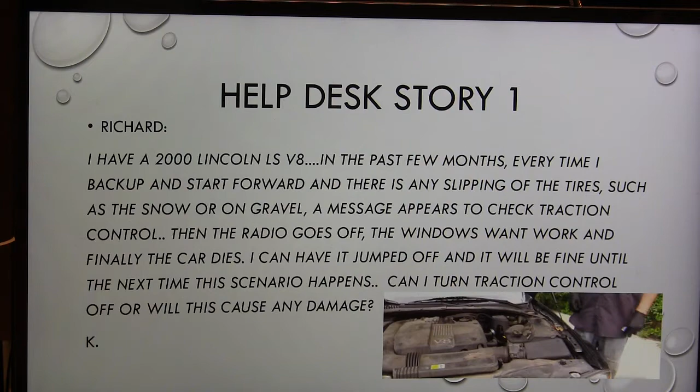It won't work. I can have it jumped off and it'll be fine till the next time the scenario happens. Can I turn the traction control off, or will this cause any damage? Was the traction control what was causing his problem?

Now, I happen to have known of a few of these Lincolns giving screwball problems like this, and if any of you guys have seen this, you're already going to know what I was going to tell the guy. But what I told him was the traction control wasn't causing that. In all likelihood, he had one bad ignition coil. One bad coil can cause all kinds of crazy problems all over the car that come and go, because of RFI, radio frequency interference.

So he followed up and said, you're the best. I've replaced 2 ignition coils. My mechanic told me I need to replace the other one soon. He wasn't able to detect the problem with this one. I can't wait to tell him. I bet this has been the problem all along.

Now, that wasn't really such a terrific follow-up. I never heard from him again, but I felt like that's probably what his trouble was, because those Lincolns were dreadful for that, and some other Ford products will do that too.

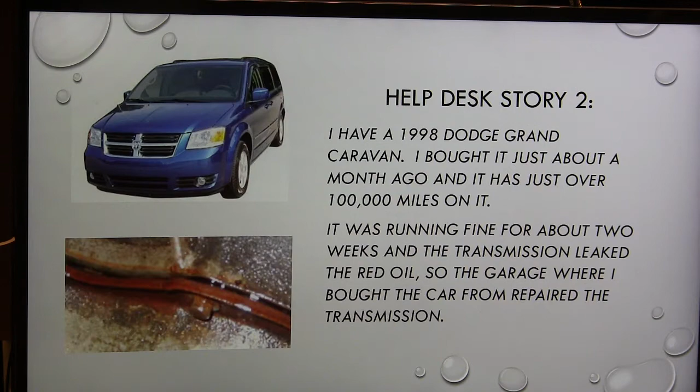All right, help desk story 2. Got a 98 Dodge Grand Caravan, bought it just about a month ago, and it's got over 100,000 miles on it. It was running fine for about 2 weeks. The transmission leaked red oil. So the garage he bought the car from repaired the transmission.

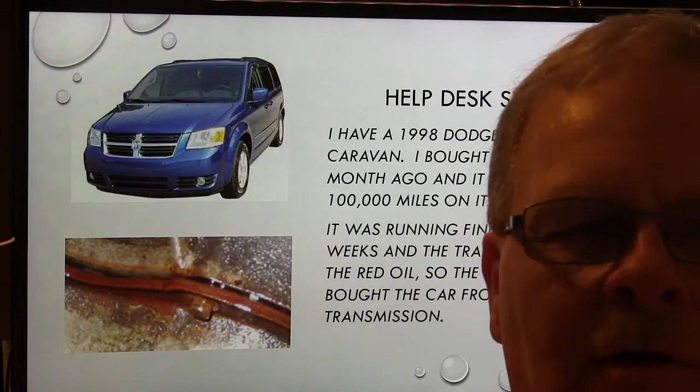So he had to have his transmission worked on because the oil leaked out of it. I guess they were fixing whatever caused the leak. He didn't tell me what the leak was, but for the purposes of making the presentation not quite so dull, I put a leak in a transmission pan here. I don't know what his leak actually was.

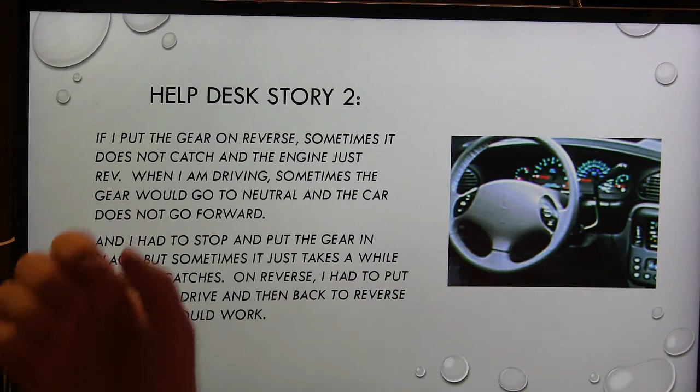All right, so if I put the gear in reverse, sometimes it doesn't catch. This happened not long after he got the car back. And when he was driving, sometimes the gear would go to neutral and the car wouldn't go forward. I had to stop and put the gear in place. I don't know what that means exactly, but sometimes it just takes a while before it catches. So on reverse, he had to put the car in drive and then back to reverse before it would work.

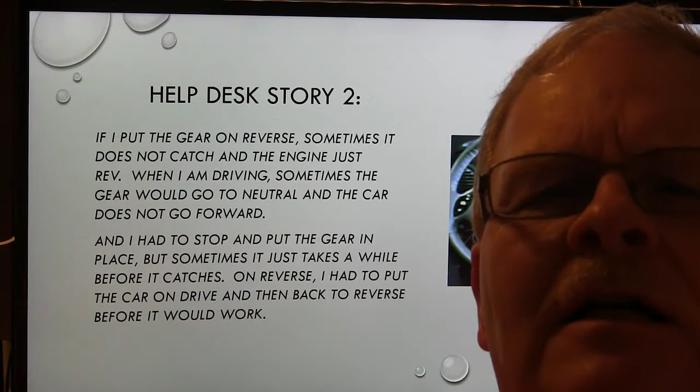He's wanting to know, so what comes to mind? What do you think this is? Anybody that does any transmission work has probably run into something like this at some point, and some of you probably already know what's going on.

He said, I'll take my car back to the garage. I hope you don't mind explaining to me what the possible problems are, so on and so forth. I said, that sounds like the transmission's low on fluid.

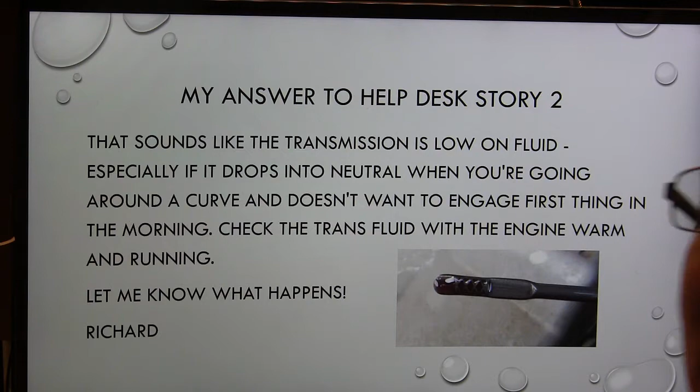Whenever you're driving a car and you go around a curve and the transmission drops into neutral, chances are the transmission fluid's splashing. And you'd be surprised how many cars there are driving out there with dipsticks that are the wrong length in the transmission or even in the engine oil. I'm not exactly sure how that happens, unless somebody lost the dipstick, forgot to put it back when they were filling one up with fluid one time, and then they put another dipstick back in there they thought was right, and sometimes you run into issues like that.

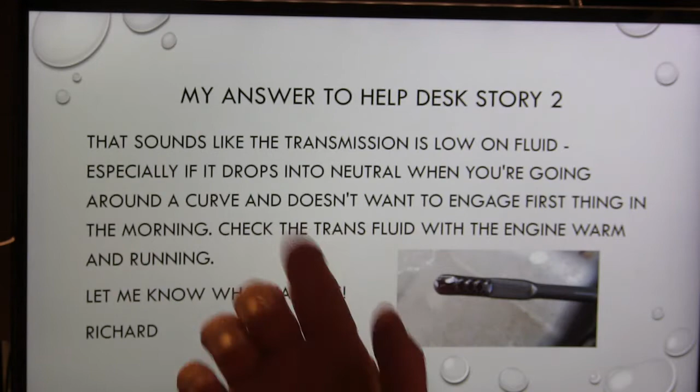But I said, let me know what happens. Have somebody check the transmission fluid, make sure it's full of fluid before you do anything else. My idea is always to do what's cheap and easy first. I preach that a lot on here.

Okay, so he said, I took the car back to the garage and they kept it half a day and told me it would cost over $500 to fix the problem. That's an interesting development, isn't it? Told them I'll think about it, took the car to another place, told them to check the transmission fluid. They said it's low, filled it up, and I haven't had the problem anymore. Well, that's kind of interesting, isn't it?

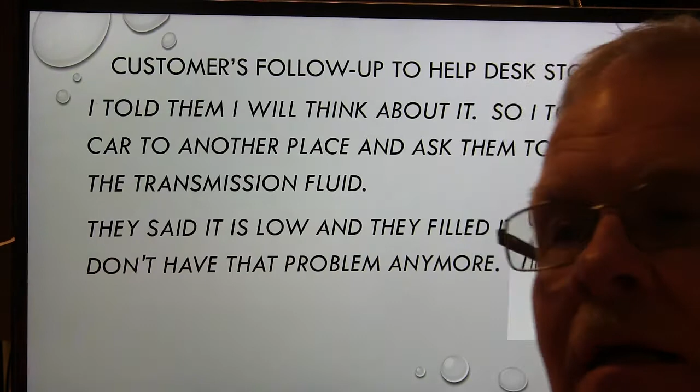The first shop didn't check the transmission fluid. I don't know exactly what was going on there. I don't know where this shop was. I don't know who the mechanic was that worked on it. So I don't really have an axe to grind against anybody. These come from all over the country.

Alright, says the guys at the garage were talking about taking the whole transmission down, but you pinpointed the problem, you're a lifesaver. Alright, help desk story 3.

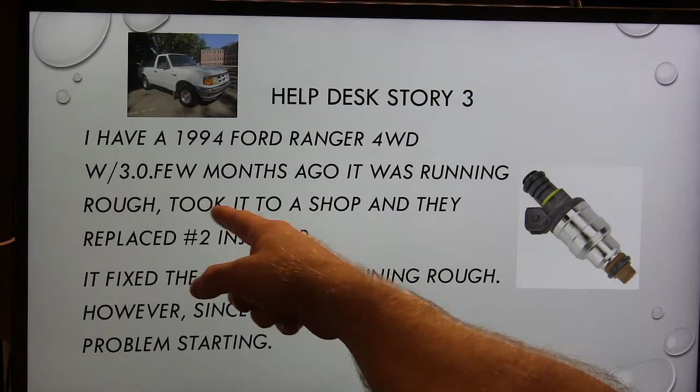I've got a 94 Ford Ranger, and it's got a 3-liter, FE whatever that means. A while ago it was running rough and took it to a shop and they replaced the number 2 injector. It fixed the problem of running rough, however since then it has had a problem starting.

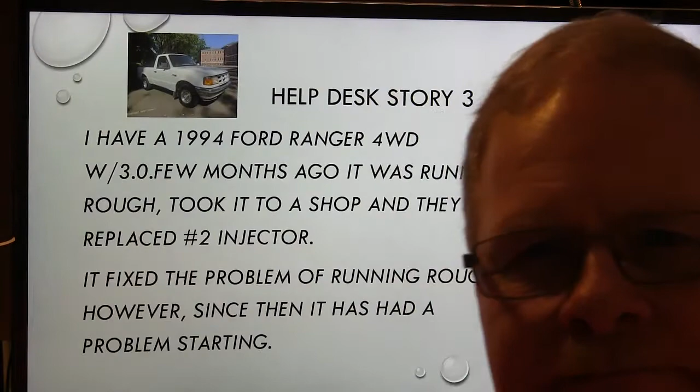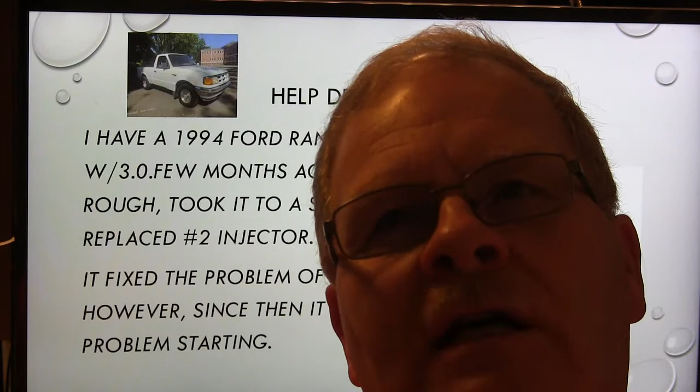Now that's kind of interesting, isn't it? If it wasn't doing this before. Now sometimes, even though it wasn't doing it before, it doesn't mean that what you did caused it, although sometimes it does, you know what I mean? And in that case, you just typically like to give the customer the benefit of the doubt.

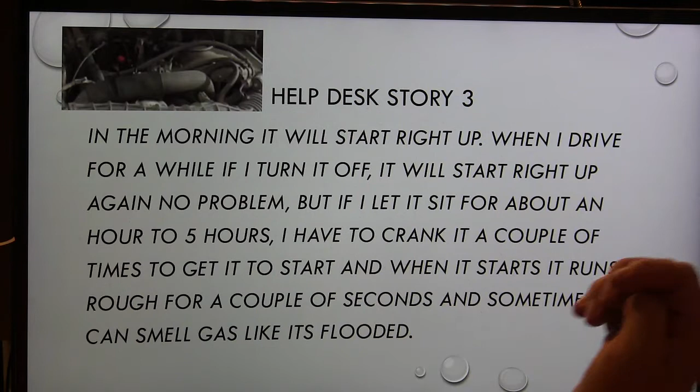In the morning, it'll start right up. When I drive for a while, if I turn it off, it'll start right up again, no problem. But if I let it sit for about an hour to 5 hours, I have to crank it a couple of times to get it to start. When it starts, it runs rough for a couple of seconds, and sometimes you can smell gas like it's flooded. That's an interesting piece of information.

Now, I will tell you this, fixing stuff long distance or over the phone is a drag. It's difficult to do sometimes, and you really want to go help somebody. I got a call one time from Africa when I was working at the Ford dealer. Then we also had Jeep and stuff. These Italian mechanics had run out of ideas on this Jeep Cherokee, and I managed to talk them to a solution on that vehicle to get it started, and that just blew me away. I mean, it was a scratchy phone call, sounded like it was coming from the other side of the planet. And how they knew to call me at the Ford dealer in Alabama, I don't know.

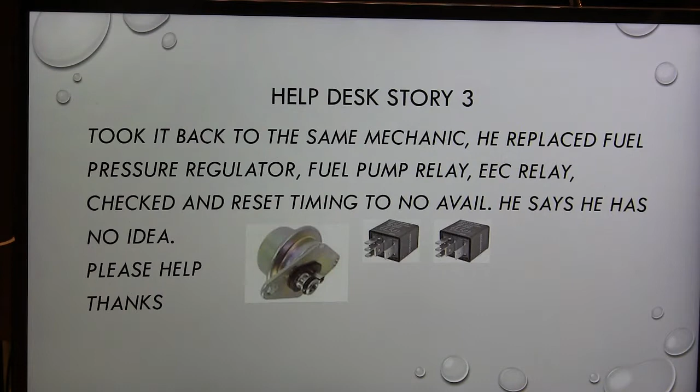But anyway, so he said, took it back to the same mechanic. He replaced the fuel pressure regulator, the fuel pump relay, the EEC relay, checked and reset timing to no avail. He says he has no idea.

Now that's pretty scary when you're taking it to somebody who's supposed to be working on your car and they keep working on it and they say, I don't have any idea what's wrong. That's spooky, isn't it? Can you put yourself in the customer's place, right?

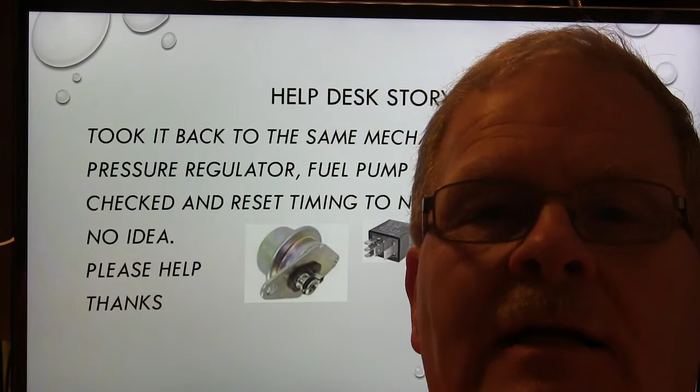Okay, so I says, get it to the point of where it'll exhibit the symptom. Whenever I've done anything like this, what I would do is I would start it up, and while it was still running crappy right after it started, I'd switch it off. Don't let it smooth out. Switch it off, pull all the plugs out. You're going to find one that's soaking wet with fuel.

This is not when it's running normal after it finally clears up. Find one that's soaking wet with fuel or sooty. That particular injector is going to be the one that's dripping. Now the other end of that is one dripping injector, when the engine is hot, can fill the entire manifold up with enough steam that can condense and wet all the plugs briefly when you're first trying to start it. And one dripping injector can cause a hard start.

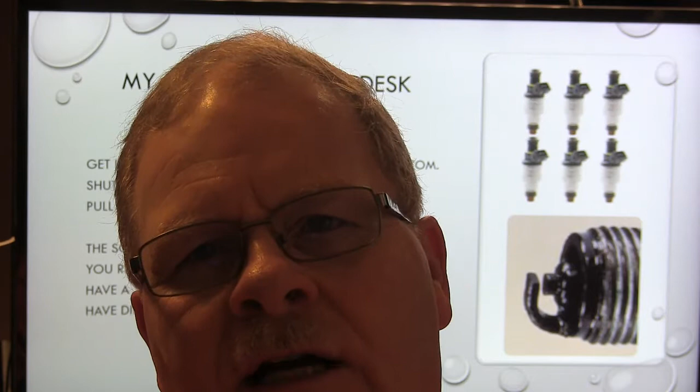First time I ever saw that was on a Thunderbird that had 3 dripping injectors, and it'd spin about 45 seconds before it would fire up. And usually, breathe on one of them, they fire right up.

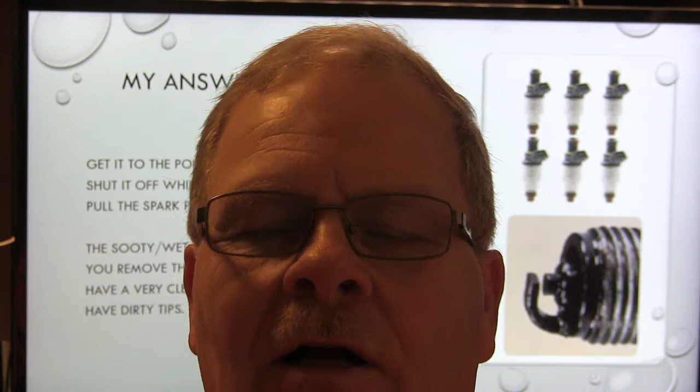Anyway, I says, when you pull the injectors out after you find a sooty spark plug, one of the injectors is going to be clean on the tip. If the injector is not leaking, it's going to have carbon and black crud on the tip. But if it's clean as a whistle, it's leaking, and that gas is keeping that carbon dissolved off there. So that particular injector will be your leaker. If you replace that one injector, then you'll have it done.

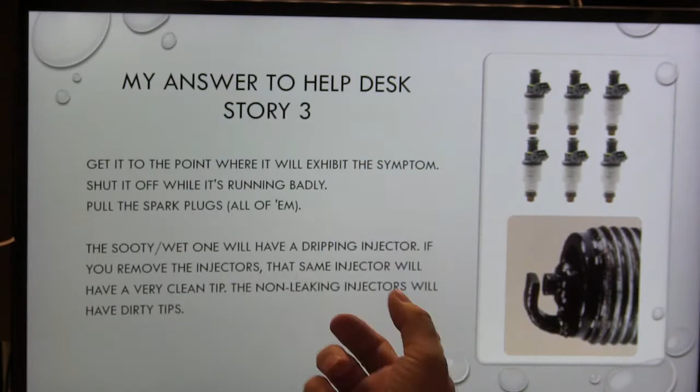I've fixed all kinds, Fords and Jeeps and other vehicles, the same way. So I said the non-leaking injector will have dirty tips.

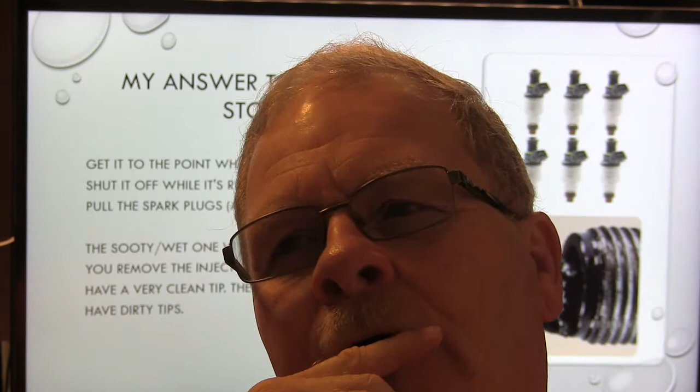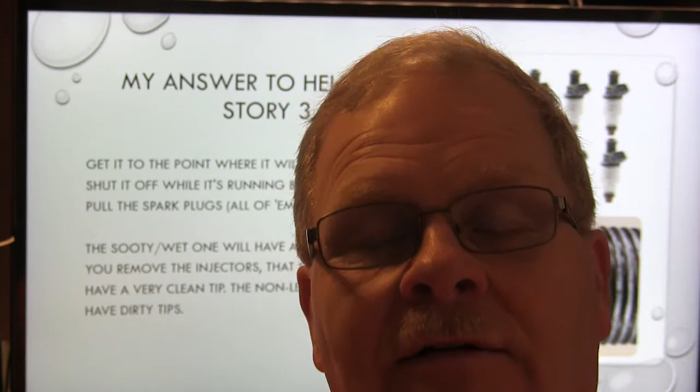Another thing you can do, if it's not a fuel injector and it's not a hard start, but it skips when you first start it until it smooths out, particularly if you're losing a little bit of coolant - if you do that and switch it off while it's still skipping, and you pull the plugs out and you see steam rolling off one of the plugs, you've got water, or coolant, making its way into that cylinder. That's another technique I've used.

All right, here's a follow-up: thanks, works great now, Tom. That's not really any information. I guess he felt like he needed to tell me that everything was okay, but I don't know what happened. He didn't give me any data here.

In this consumer-driven world, folks tend to take their business elsewhere if they don't like the merchandise or the service. That's just the way it is. Most people don't mind paying the bill if the vehicle is fixed when they drive away. But if they pay a big bill and drive away and they still got the same problem, they tend to get pretty hot about that.

Rather than giving the first shop a chance to straighten things out, they try another shop, and I'm always saying, why did you go to a different shop? Because when you go to a different shop, it turns into a he said, she said, and we didn't do that, and nobody winds up responsible, and the customer's holding the bag.

Some of them tell me they've gone back to the first shop, been told more money needs to be spent, and that kind of thing's frustrating. Who wouldn't lose confidence in a shop like that? But from a shop owner or technician's perspective, sometimes it seems like the deck is stacked against us.

One time I was working on a vehicle that was the dealer transfer vehicle. It was a '92 Ford Taurus that had 325,000 miles on it. Still ran like a sewing machine, but other parts of the car tended to wear out. This old guy who drove that vehicle for the dealer transfers actually brought the car in for some wiper blades. I went out there, got the wiper blades from the parts room, went there and popped them on.

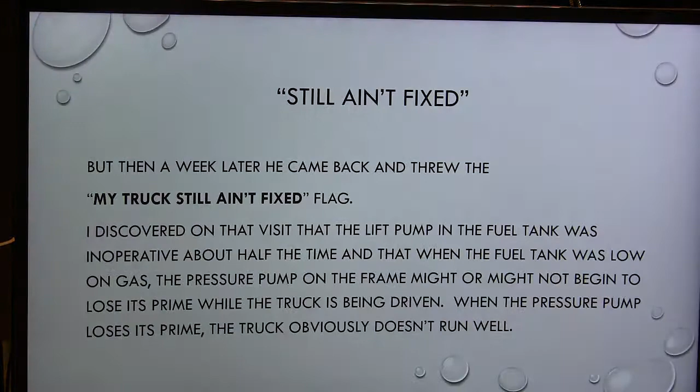When I did some checking, what I found out was the lift pump in the gas tank - back before 1990, Ford had a lift pump in the tank and a pump on the frame. If that lift pump wasn't consistently feeding the pump on the frame, you'd have all kinds of issues, sometimes no-starts and other things. Ford was doing that back in the 80s - they'd put a little lift pump in the tank, kind of like a windshield washer pump, that just moved the fuel to the big pump on the frame. They finally got smart and did away with that in 1990.

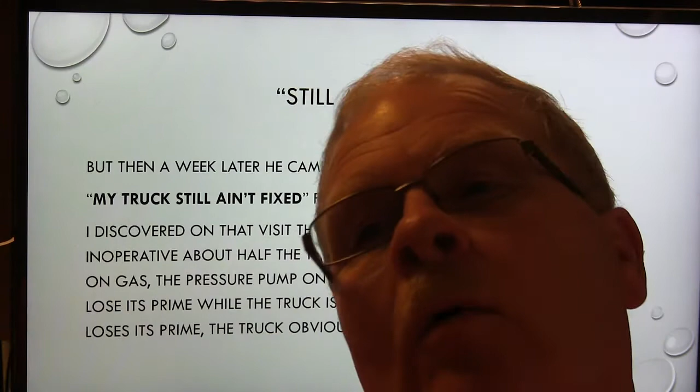The point is, when I put my ear - sometimes I'd just put my ear against it, or use the stethoscope - I could tell the pump in the tank was coming and going. When the pump in the tank was not pumping, it would cause bubbles and stuff, and the pump on the frame would lose its prime and cause it to run bad. I told him, I'd already done all this - I didn't sell him anything he didn't need, right?

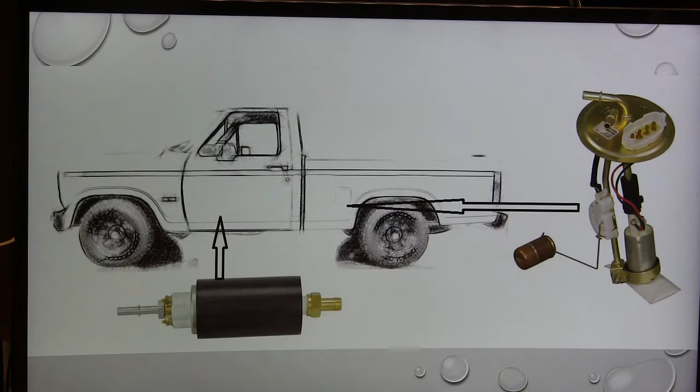So the pump in the tank feeds the pump on the frame on these older model trucks - that's just the way that thing's set up. That would throw a lot of people because they didn't know there was two pumps.

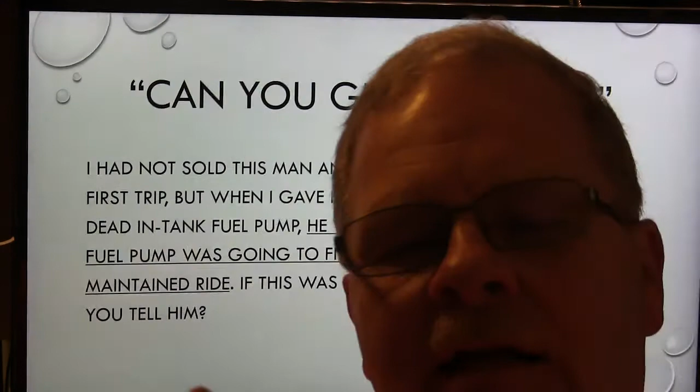But anyway, I hadn't sold him nothing he didn't need. He had another problem - he'd already paid us a bunch of money and had the idea it was our fault because we didn't catch everything. But if you've got a pump in the tank that's coming and going, you're not going to catch it. If you fixed everything else and it runs good, and you didn't drive it 50 miles, you may not catch the pump in the tank not working right.

So he says, if you put this pump in this tank, is this going to fix my truck? Well, it's a junky truck with lots of miles on it - he didn't maintain it worth a flip. I said, you won't have any more trouble with your truck, you won't even ever need another oil change, it'll never need to be back in the shop for anything else, it'll be fixed forever. Really? This guy's whining about this.

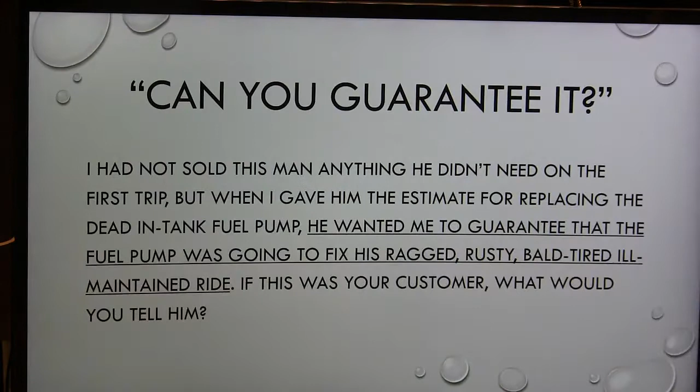So anyway, I sent him back to talk to the service writer. I don't remember if he let us fix that truck or not, but some people you can't satisfy.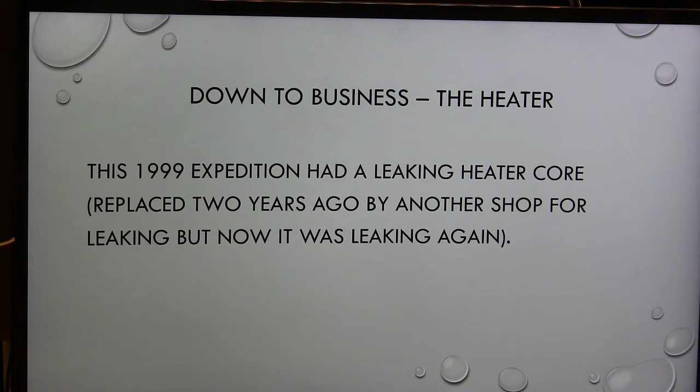All right, so we had to pull all this junk off to get to it, and that's what it looked like right there. This was at the college. The first thing the guy noticed when he pulled the panel and accessed the blend door and the heater core was that the blend door was installed upside down. He had done these before, and he was sharp enough to catch that.

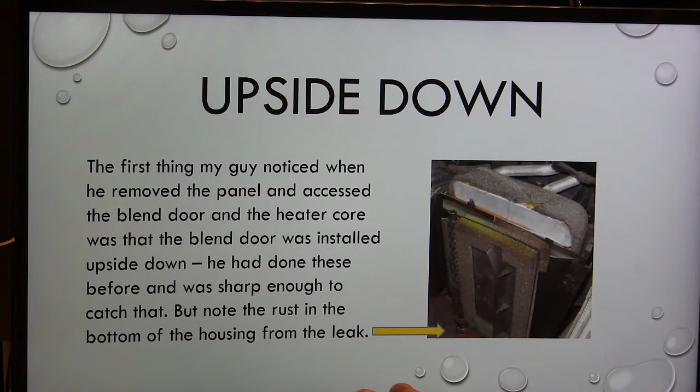Notice this rust in the bottom of the housing from the leak. This same one also had a blend door actuator that was full of ants.

Ants will cause all kinds of problems. I don't know why they like to go to the places where they can cause the most trouble, but a lot of times they do. I've seen ants piled up a quarter of an inch thick all the way across a battery from one terminal to another, killing the battery. I ain't kidding about that.

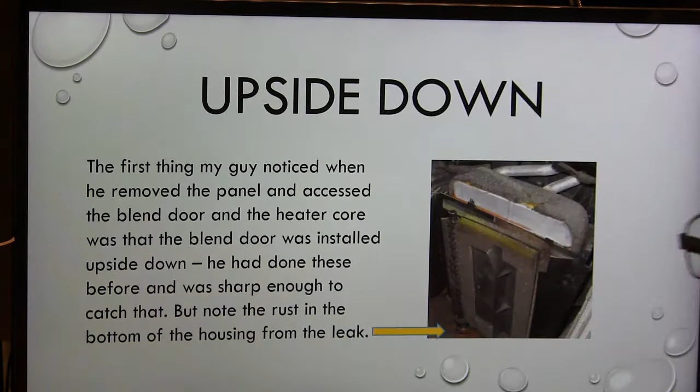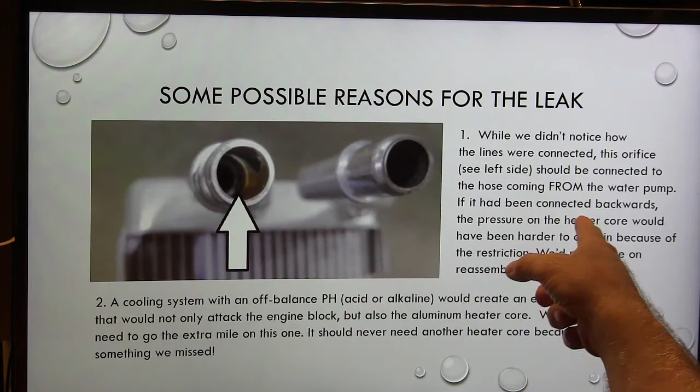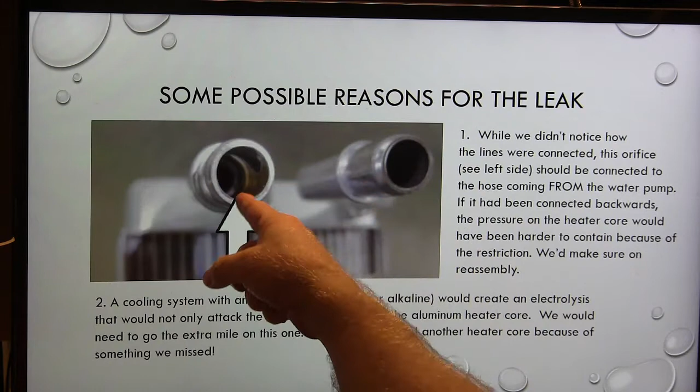Okay, some possible reasons for the leak. We didn't notice how the lines were connected when we took it down because we were pulling it apart. But from the water pump, see that little orifice in there? A lot of them will have a bigger pipe on the outlet than they do on the inlet. This one here had the same size inlet and outlet, but this little orifice in here was basically acting like the small pipe. So a cooling system with an off-balance pH, acid or alkaline, can cause it to go bad on the inside.

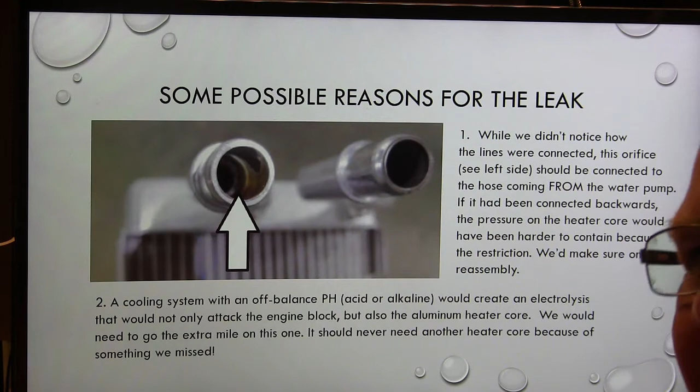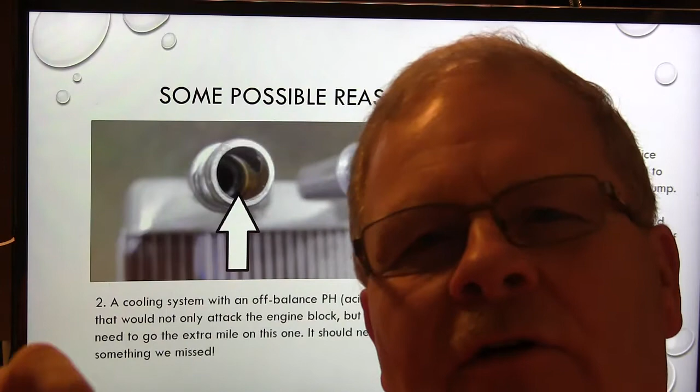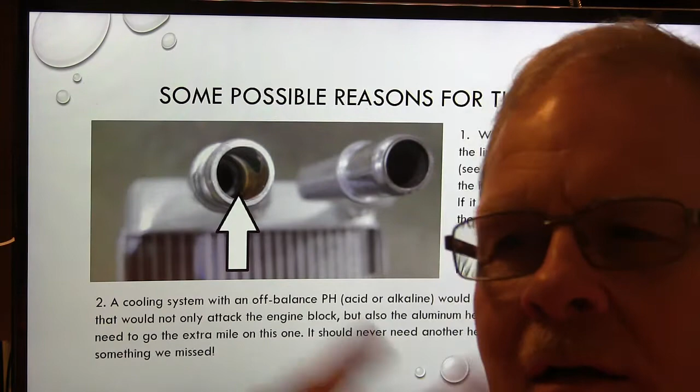And electrolysis will begin to eat that aluminum away. Have you ever seen those radiator caps that's got a little anode built under them that's supposed to neutralize electrolysis? Ships, aluminum boats have got anodes on the back of them, and those dissolve and keep the aluminum boat from getting eaten up by electrolysis in seawater. I learned that when I was down in Cajun country working.

Anyway, the owner of the shop called me to see if I had anybody he could use. This is a sidebar. He said every technician he hired for the past 2 years disappointed him. They start out strong, but they get lazy and they get to work. He was trying to pay these guys a straight time wage, and they were tickled pink with that instead of having to work commission. But they'd start out working real hard, and then they get slow, and then they get where they didn't produce. That's why most shops like to pay mechanics commission.

One of the best ways to pay a mechanic, I think, is to give him a guarantee up to a certain level and then pay him whatever he makes over that. A lot of times that'll put enough of a carrot out there. It depends on the mechanic's personal work ethic. I have seen guys that were on commission that got put on salary and just quit working, they quit turning any hours. So some people really crank out a lot of good hours when they're on commission, but won't work when they're on straight salary.

Anyway, so I sent this guy, the guy that did the work on this expedition, and he couldn't have been any happier with that fellow. Energy, enthusiasm, work ethic, and that same guy is now working at a dealership making really good money.

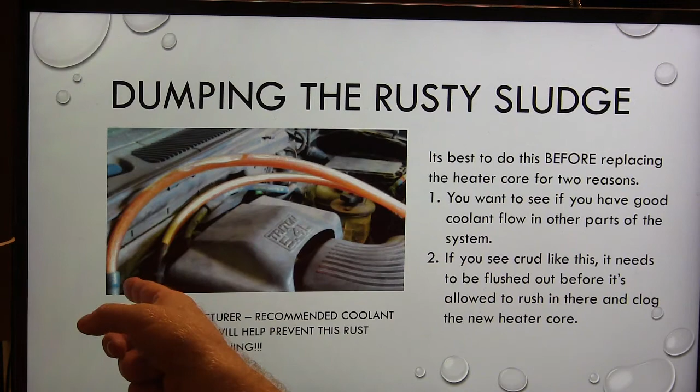Now, what I did here, I take a clear hose and loop out the heater core. I'm going to do this when I'm trying to figure out if there's good coolant flow going to the heater core. You'll be surprised how much you can learn by just looping out the heater core with a clear hose like you buy at the hardware store and fire it up.

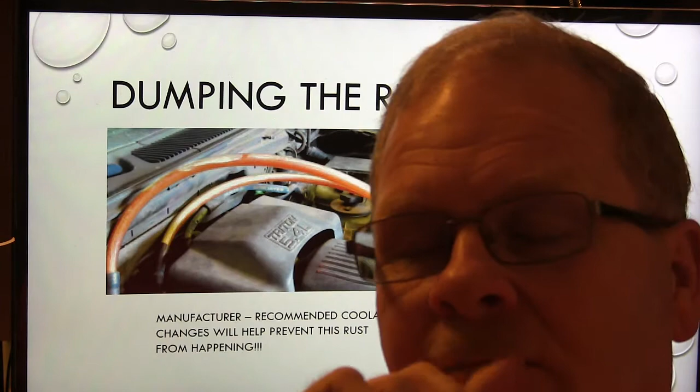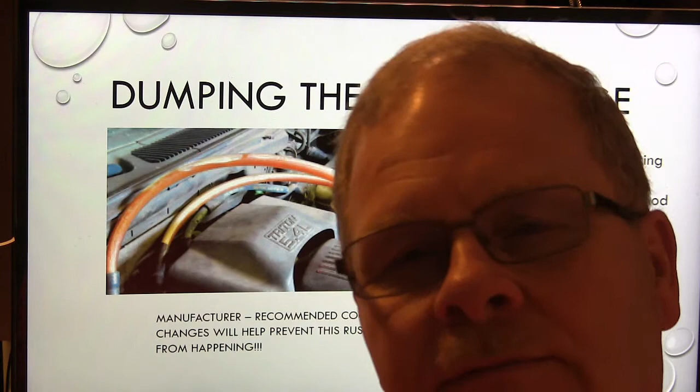Now, I had it out there on the back slab by the steam cleaner and all, and I said, look at all of this. There's a lot of rust and crud going through there, but we had pretty doggone good flow through there. If you don't have any flow through there, look for a water pump problem. If you got an impeller that's eroded away on the water pump, you won't have good flow through that heater hose. Sometimes, even though the car is not overheating, you may have a water pump that's cavitated or something like that.

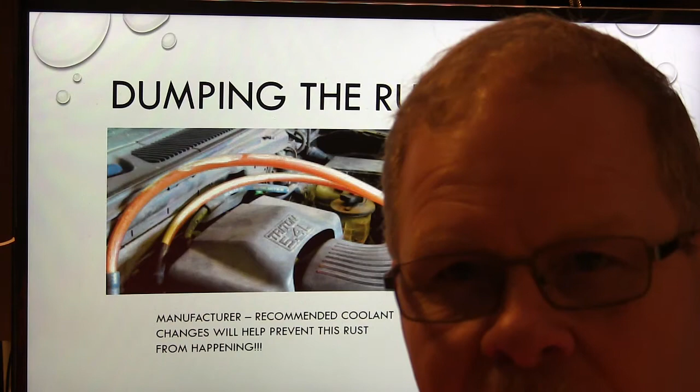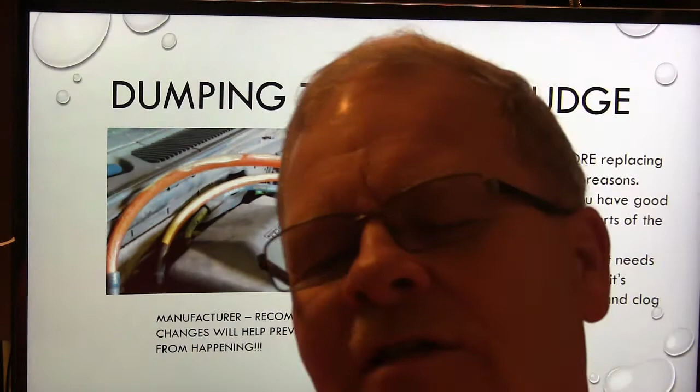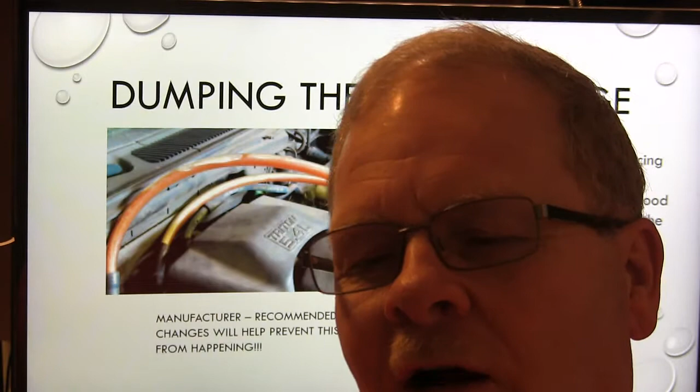So clogged heater core because of this rust is another problem. What I did with this one was I pulled the hose off and kept adding water to the radiator while it was running, letting it just push that rusty water out. There was no antifreeze in it. I kept adding water with the engine running until all of that rust was gone. Then we flushed out the heater core by hooking that one hose up to the heater core and letting it come out the other way. That worked pretty doggone good.

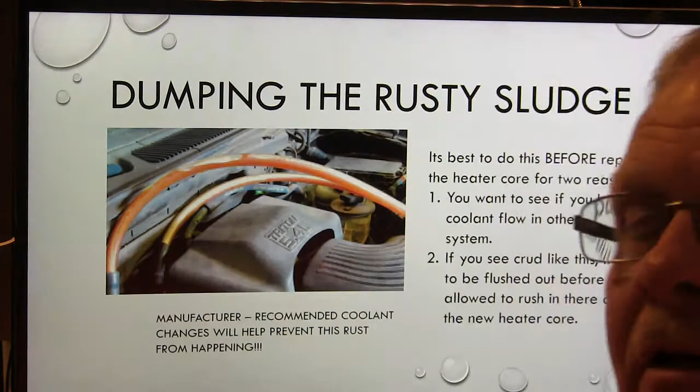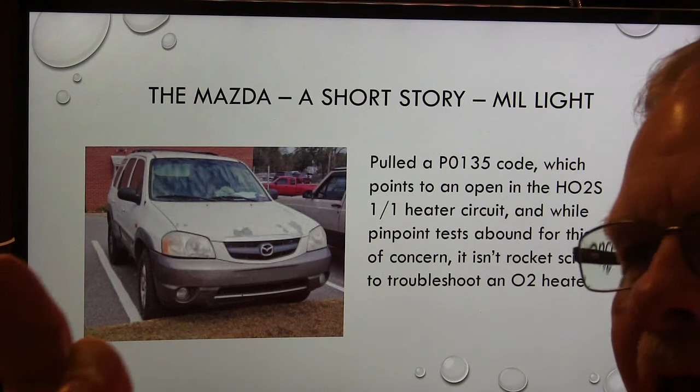Alright, so on this Mazda we pulled a P0135 code, which points to an open in the HO2S 1/1 heater circuit, similar to what we had the other day that I was talking about. The pinpoint tests abound for that kind of concern. It's not rocket science to troubleshoot an O2 heater.

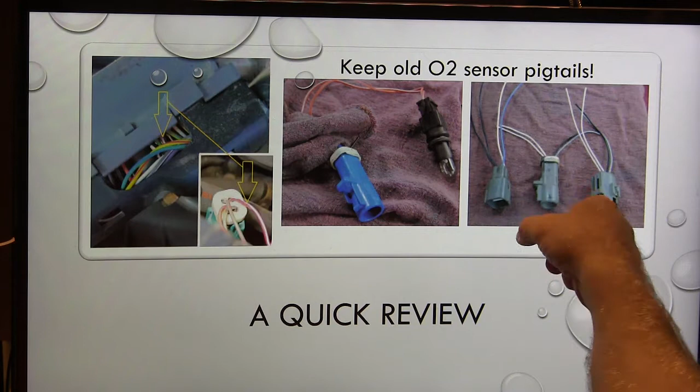This is what I was talking about. Right here, this wire here and that wire there are the ones. That wire leads to this oxygen sensor, right? So you keep your old O2 sensor pigtails. See how the two white wires are always a heater? You can hook that light to those two white wires on an old oxygen sensor pigtail, plug it into the harness, fire it up, and see if that light comes on.

Works really well. On this particular one here, we found out the sensor had good 12 volt power going to it. There's your red white wire right there. So we didn't need to go that way.

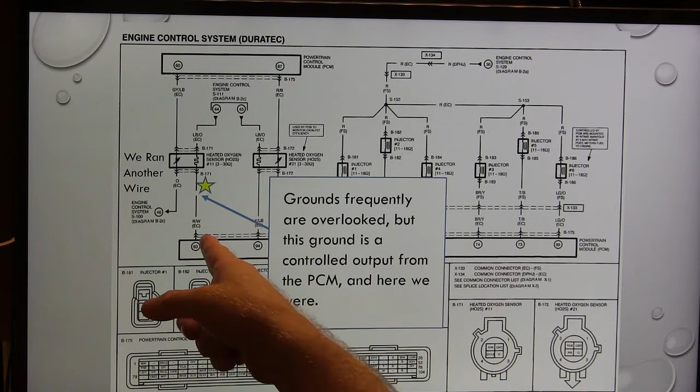The grounds are frequently overlooked, but this ground is the controlled output from the PCM, and it was an open circuit between there and there. So rather than digging through the harness and splitting all the tape off and opening up the convolute tube, we went ahead and ran another wire and took care of the code, took care of the light, took care of the problem.

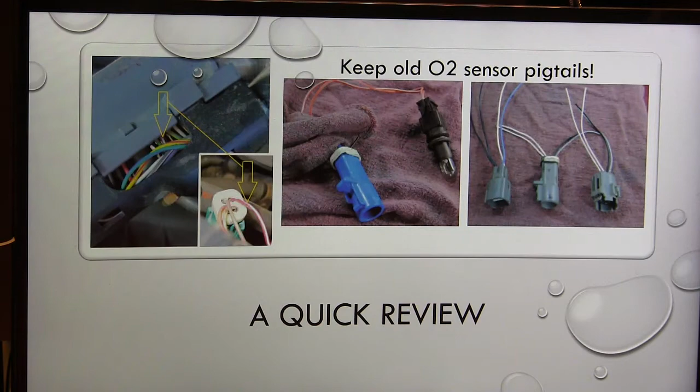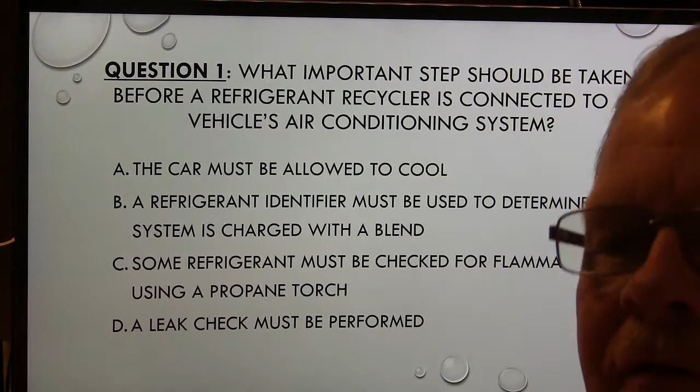Question 1. What important steps should be taken before a refrigerant recycler is connected to a vehicle's air conditioning system? This is the one that's going to pull the refrigerant out and store it, right? It pulls it out, filters it, puts it in a tank so you can put it back in when you're done doing your work. So what do you need to do?

Got to let the car cool. Supposed to use a refrigerant identifier. Some refrigerant must be checked for flammability using a propane torch, or a leak check must be performed.

Alright, checking my time here.

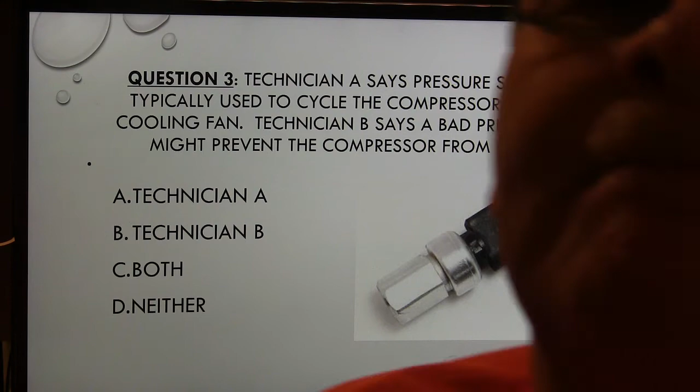Question 3. Technician A says pressure switches are typically used to cycle the compressor and or the cooling fan. Technician B says a bad pressure switch might prevent the compressor from engaging. Who's right about that?

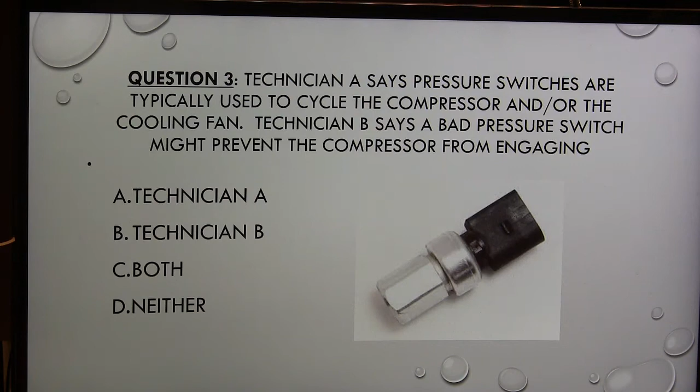Question 6, the evaporator thermistor: A, prevents excessive high pressure. B, prevents excessive moisture buildup on the condenser. C, signals the controller concerning evap temp to cycle the compressor to prevent evaporator icing. Or D, reads evaporator pressure.

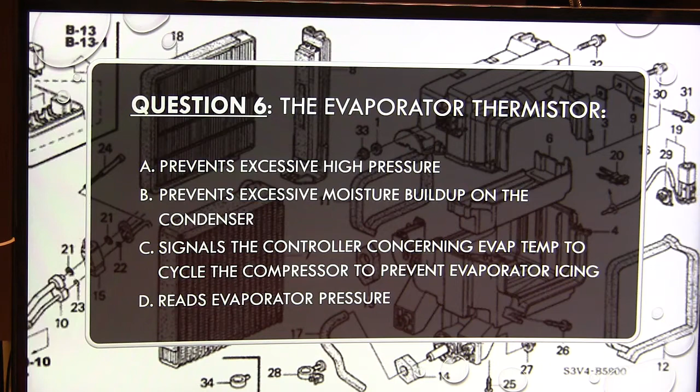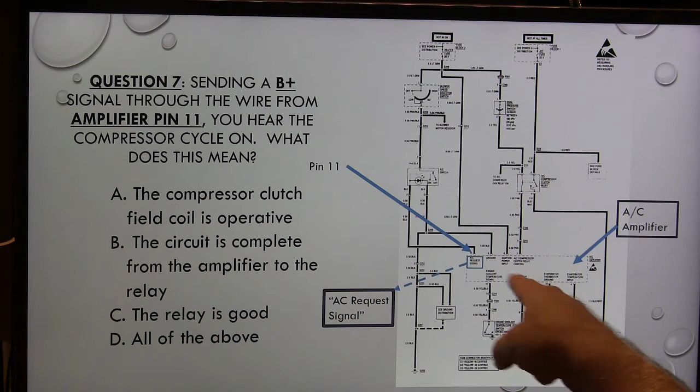Okay, the compressor clutch field coil is operative. Is the circuit complete from the amplifier to the relay? Is the relay good, or is it all of the above? What is it? The AC amplifier is a little electronic component that takes inputs and provides outputs for the AC system. Those have been around for a long time on some vehicles.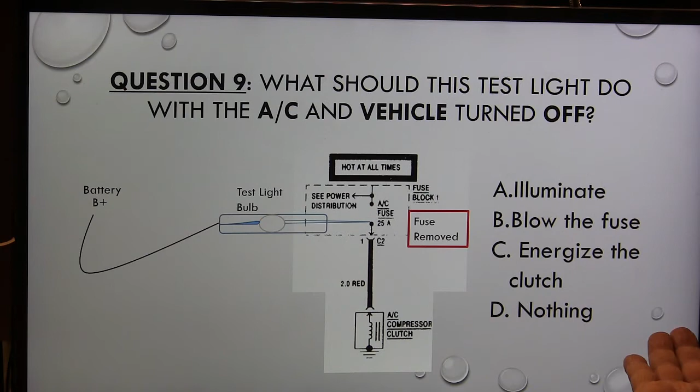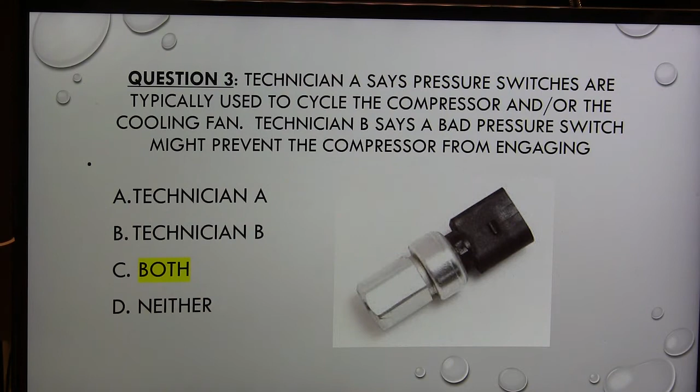Question 3: Technician A says pressure switches are typically used to cycle a compressor and/or the cooling fan. Both of those guys are right. This thing can keep the compressor from engaging. A test light's connected between ground and the trigger side of this normally open relay coil. The relay ought to go click, it ought to close, because that test light has enough current carrying capability — it's actually to this little relay coil, that test light is a wire — and that is going to close it. It's going to provide a ground signal.

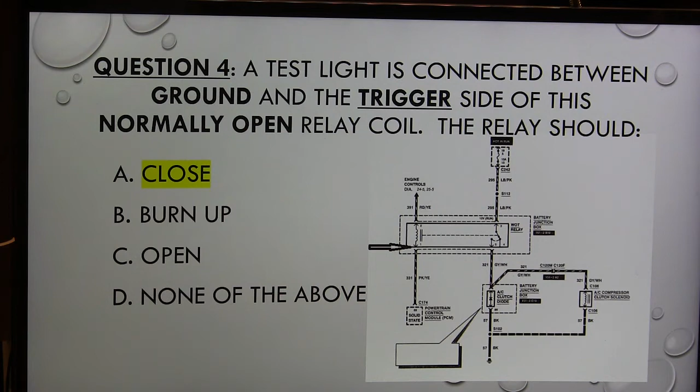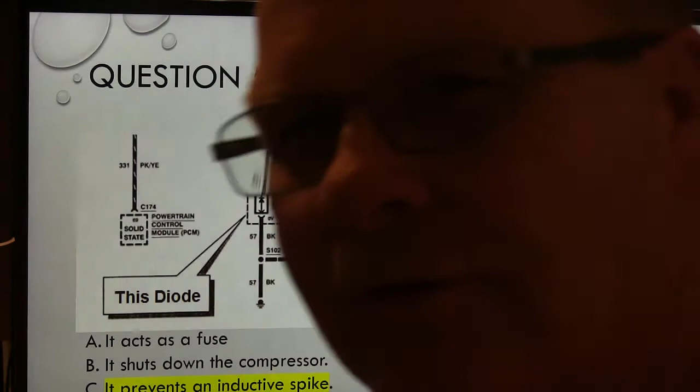Question 5: What's the purpose of this diode? This diode basically prevents an inductive spike. I worked on a truck one time that had a power takeoff with an AC style clutch on it, and it kept frying the radio. When I put my scope on it, I found a 400 volt spike coming out of that coil in the PTO clutch every time they turned off the switch, and it was kicking back into the radio and destroying it.

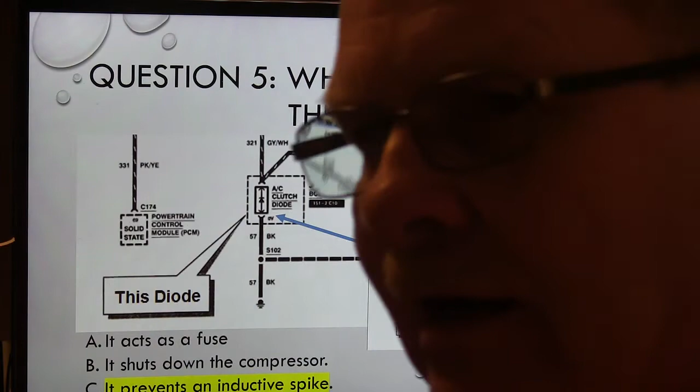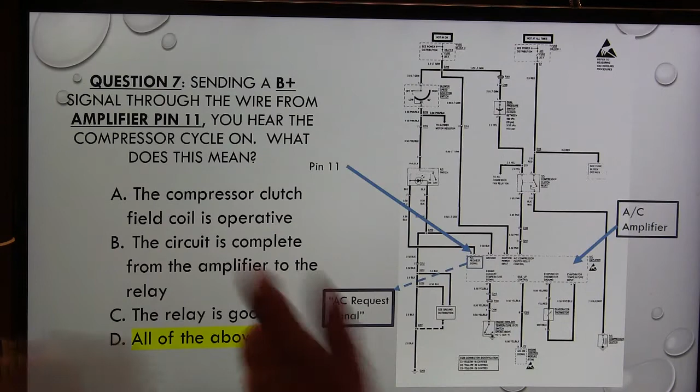Question 6: The evaporator thermistor keeps the evaporator from icing up by turning off the compressor if the evaporator gets too cold. Question 7: Sending a B+ signal through the wire from amplifier pin 11, you hear the compressor cycle on. That means the compressor clutch is good, the circuit's complete from the amplifier to the relay, and the relay is good. That's a way you can eliminate a whole bunch of stuff — a whole part of your circuit.

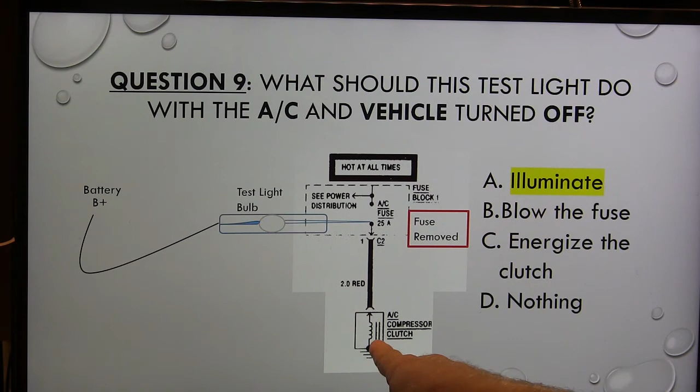Question 8: This provides a ground path for the LED and the switch. If you see that little symbol with those two arrows coming off, that is an LED, okay? What should this test light do with the AC and the vehicle turned off? It should light. If this circuit is good and that compressor clutch is not burned out and that ground is good, that should light that light. That's a way you can tell if you've got a burned out compressor clutch.

Really important. Question 10: If the blower motor relay contacts are stuck closed, what speeds will work? When that relay is closed, the only speed you're going to have is high, and it'll be blowing all the time. If it's stuck shut, like welded shut, you're going to have the fan blowing all the time because it's got a ground. See that? This is on a Chevy truck.

All right, I hope you got something out of this.